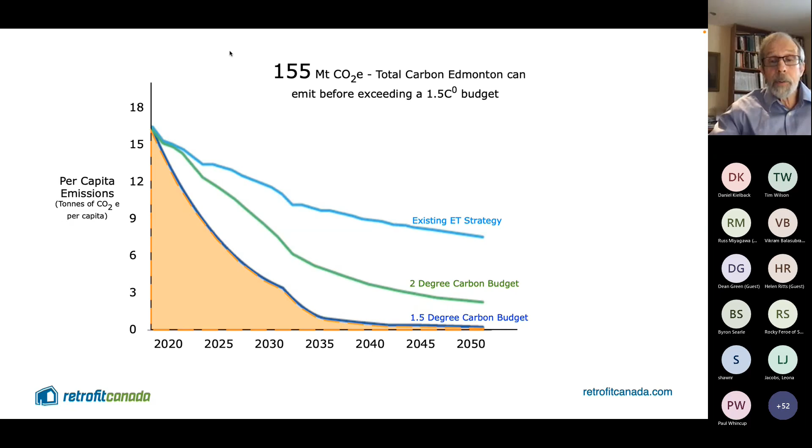If we wait 20 years before making deep cuts, it'll be way too late. In fact, at the rate we're going, Edmonton will have blown through its GHG budget in 8 years - actually 6, really. This is a 2-year-old slide.

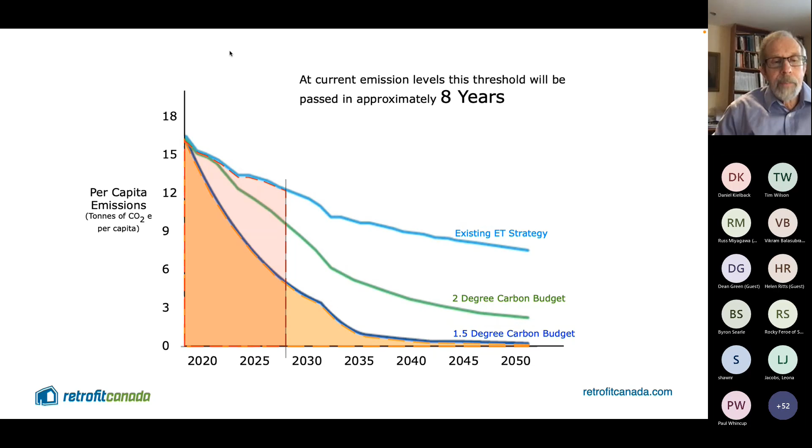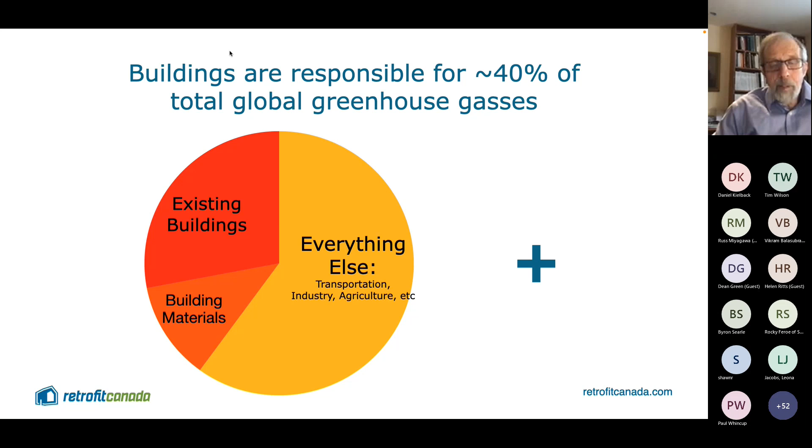And we're not alone. These graphs look pretty similar all over the industrialized world. Buildings are responsible for about 40% of total GHGs, most of that from building operation. And 70 to 80% of the buildings we'll be using in 2050 are already built. So there's just no path to a stable climate without industrial scale deep energy retrofits.

When we say deep energy retrofits, I mean energy retrofits to buildings that reduce emissions enough that the remainder can be gotten from zero emission sources. There's some discussion in the community about whether there should be deep energy retrofits or whether we should just call them deep retrofits, to encompass things like embodied carbon and that kind of thing.

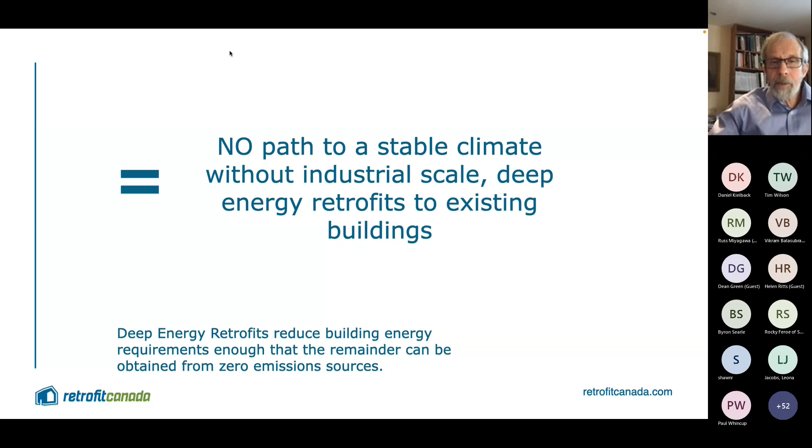But it's a really curious juncture, a profound challenge, and I think unprecedented in human existence. Our culture of building huts evolved slowly over millennia. We got really good at sheltering from the elements and making spaces where our families can thrive. It seems like such a rude shock to find out that these shelters are threatening our very existence. It just seems ironic as all get out.

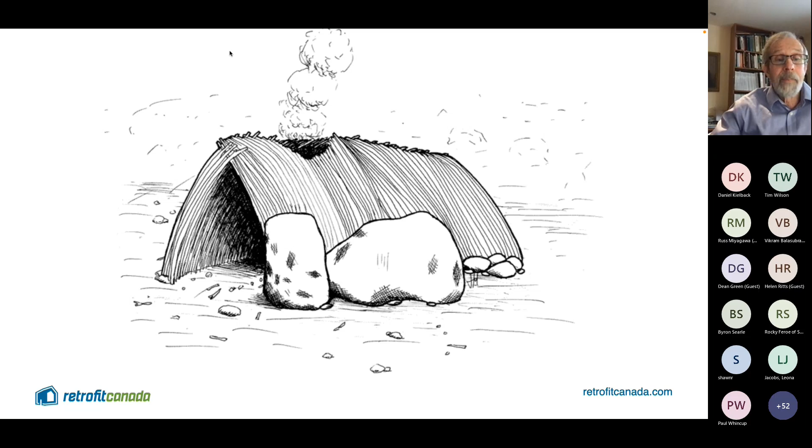So we need an industry, a massive industry. A couple of months ago I was on a call with Ralph Torrie, a really smart consultant working on a retrofit strategy for Efficiency Canada, a think tank in Ottawa dedicated to accelerating energy efficiency policy in the country. Ralph asked me - I'm a little one-at-a-time builder renovator - what would I do if I had 5,000 or 6,000 houses to do? It was kind of a shocking wake-up call. I really hadn't thought about that scale before, but that's really what we need to do.

So I started thinking about what are the ingredients we need to make this kind of a massive shift. Obviously we need market demand, there needs to be a value proposition, skilled workforce, supply chain - which I don't think would be a big problem - and all kinds of solutions to handle the wide variety of problems.

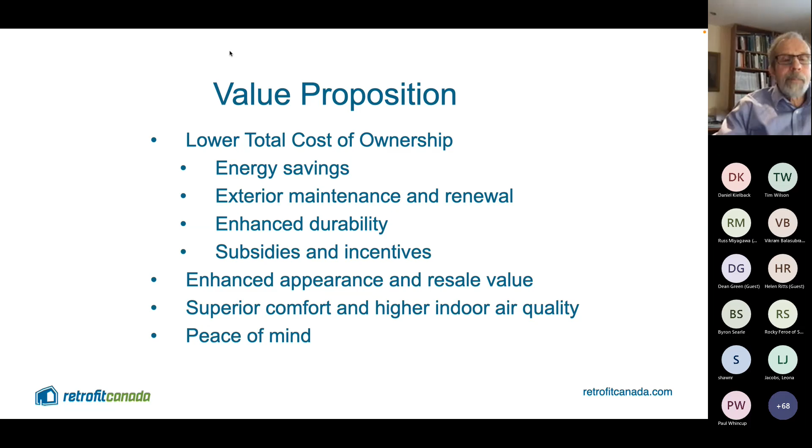So the skilled workforce is an enormous challenge. We need energy modelers who understand optimizing net zero energy solutions. There are a few of them, but there's a whole bunch that need to be retrained to learn that. We need designers who get it and build it into their designs from the beginning. We need really inventive renovation contractors who understand and practice airtight and thermal bridge-free construction, and an army of skilled tradespeople - talk about a job creation program. And in this training, passive house training is a huge asset.

We need a set of solutions and recipes that are flexible enough to deal with the incredible diversity of buildings we have - different housing types, shapes, ages, conditions, climate zones, all that stuff. We need all kinds of repetition and practice. We need to get going and do this stuff and streamline those solutions. And we need to document and share lessons so we can learn from each other as quickly as possible.

And one thing we can't do is continue with incremental piecemeal retrofits, the kind that very well-intentioned efficiency programs have been incenting for the last 50 years or so. The problem is that the measures done under these programs often make it much more difficult to ever get that building to a near zero carbon solution, to a net zero solution. They do save energy and GHGs, but most of the time they lock in the remaining emissions from that building.

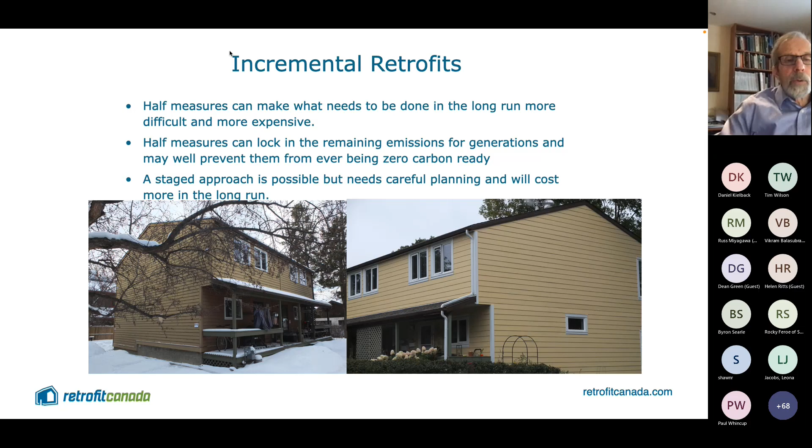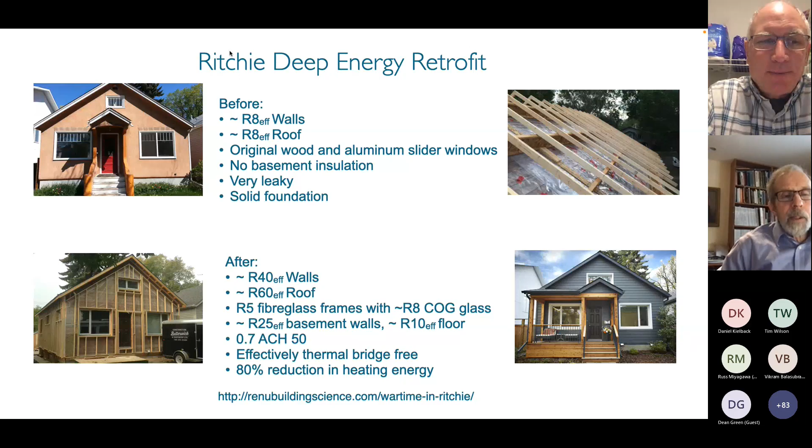The other end would be something like this duplex in Riverdale, which just happens to be where I am right now. I built this around the year 2000, to the at-that-time R2000 standard. So it's got decent insulation, reasonably airtight, fairly good windows. It's in really good condition, and it wouldn't be cost effective to do an exterior deep retrofit to it, because the upside would be too small and the cost would be huge, especially since it's kind of a rangy house with lots of windows.

I mean, to think that 3 years later the climate crisis dawned on me, it's embarrassing.

But anyway, the solution in this project is to do the easy stuff: add a little bit of insulation to the attic, which is just a matter of blowing in a little more cellulose, change out the glass in the windows to state-of-the-art glass (the frames are decent), and do a geothermal system, which we're going to try as a pioneering, directionally drilled laparoscopic geothermal system.

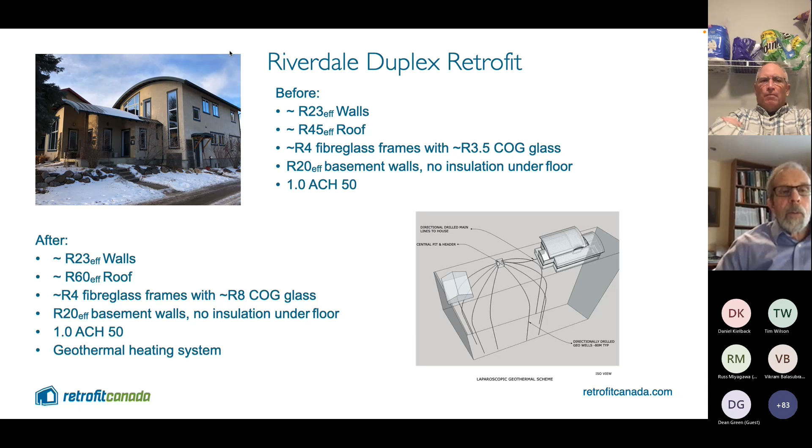So it's a broad range. There's really everything in between. We need a recipe book to help guide folks. And I'm going to show you a few of the measures that we're using, and use a couple of current projects to illustrate those. One of them is the deep energy retrofit of the Sundance Housing Co-op.

This is a 1970s, 59-unit townhouse project, 15 buildings. We're using a panelized retrofit system, with some help from NRCan as an R&D project, and it is the first large-scale trial of the Dutch Energiesprong system. Look it up—I don't want to take the time to describe it right now, but we're proud to be pioneering this technology in North America.

We're on our 7th building, so we're getting the hang of it. It's going slower than we'd hoped, despite all the cool stuff like the digital capture and offsite panelization. The grim reality is that this is exacting renovation work with all the finicky detail that implies. The good news is that as we go from building to building and run into these tricky problems, we're finding better and faster ways to deal with the weird anomalies.

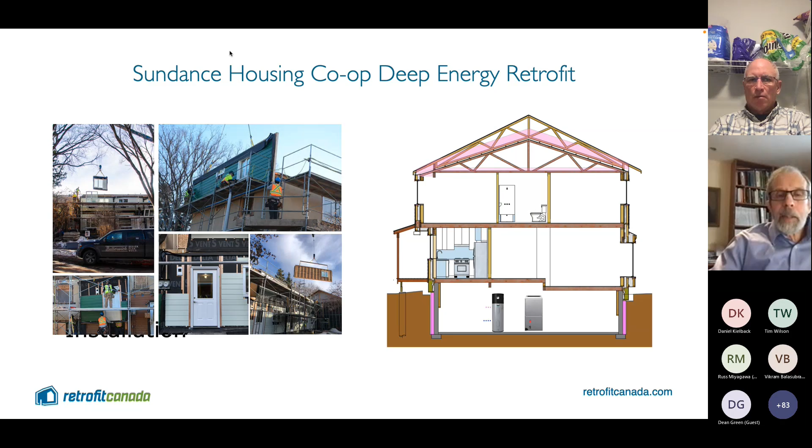We're learning a ton, and this will all be available on the Retrofit Canada website. The other project is 3 single-family houses where we're going to try to use what we're learning on the Sundance project and apply it to single-family houses. The GHG impact from Canada's 8 million single-family houses is far bigger in total and per capita than it is for multifamily buildings, and this is a problem that urgently needs solving.

So we'll be doing these 3 houses over the next building season. We're gearing up—we've got it pretty much figured out now, and we'll be sharing those solutions as well. So let's look at some of those particular things. The first thing is: don't even think about tackling a retrofit without starting with an energy model. You're shooting in the dark otherwise.

You really need to start with an existing energy model and then twirl the dials and look at the cost benefits of each measure to find the right mixture for that building, so that you're not putting way too much insulation in one place and not enough in another.

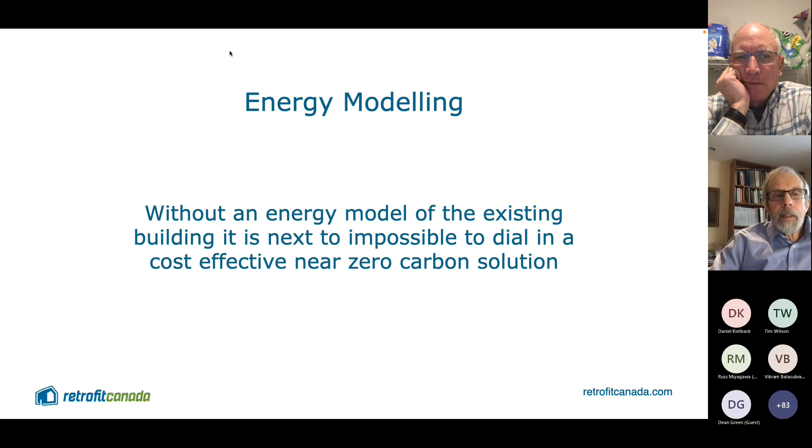Starting at the bottom, we've got a variety of foundation insulation solutions in the Ritchie project that I showed you. They insulated on the inside. That can be very difficult if the basement is finished and too expensive to be practical. Typically this is a less expensive approach if the basement is pretty unfinished.

One of the bonuses over the outside approach is that you get the opportunity to insulate the floor too, which is a big boost and kind of a sore point for me. I'm talking to you from my basement office with its uninsulated floor, and it's a daily reminder of how easy it could have been to avoid this problem.

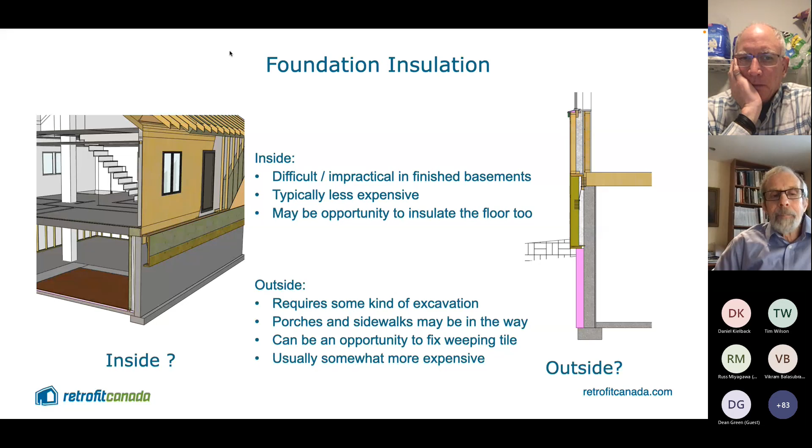On the outside, you're always going to have to do some kind of excavation. Porches and sidewalks can be a barrier, but it can be an opportunity to fix weeping tile if that's needed. And it's typically going to be more expensive.

On the Sundance project, we started by doing a full excavation with a mini backhoe, and it was a nightmare of disruption—we had to completely re-landscape, and we had mud everywhere and settling. So we've gone to a system where we hydrovac a slot around the exterior, then drop in EPS foam, and top off the wear layer with our panel support system. These details will be available. I'm not going to go into them in too much depth, but they're readily available for anybody who's interested. We're liking that system, and we have an improvement on the way with it.

And we'll be doing the hydrovac solution on the 3 SSRA houses, except for one which needs weeping tile.

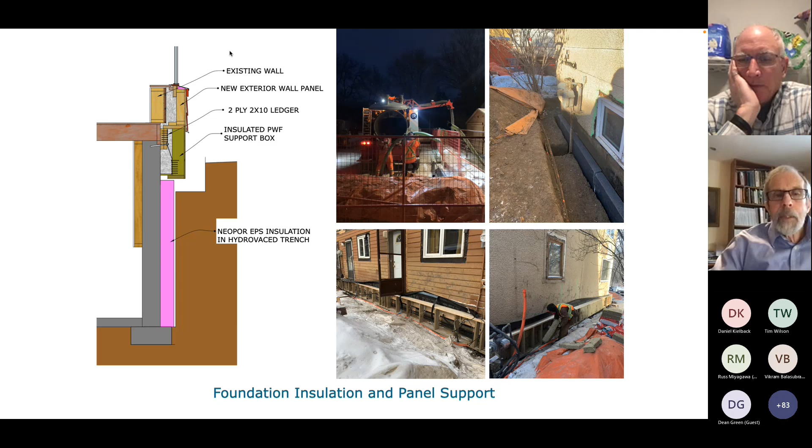So for the exterior walls, there are a few ways to go about it. Doing it on the exterior as opposed to the interior seems to be the only practical way. Working on the inside, there's far too much stuff in the way: partitions, floors, cabinets. There's the issue of the loss of interior space and the difficulty of getting any level of airtightness. So generally, the solution is to work from the outside.

On the Ritchie house, we did a very light frame build up on a panel support box at grade. We wrapped the whole house first in a poly vapor barrier, which ended up on the warm side, and then insulated inside the framing, and then put the new siding over that.

One of the good things is on the outside, it doesn't cost much more to go thicker, so you can accommodate high R values. If you add a rain screen, it can be extremely durable.

As opposed to the panelized approach, which I'll get to in a second, this site-built approach is easier in some ways, but it takes more work. It's more labor intensive, it takes longer, it's more disruptive, but you just build to what's there. It's harder to make a mistake.

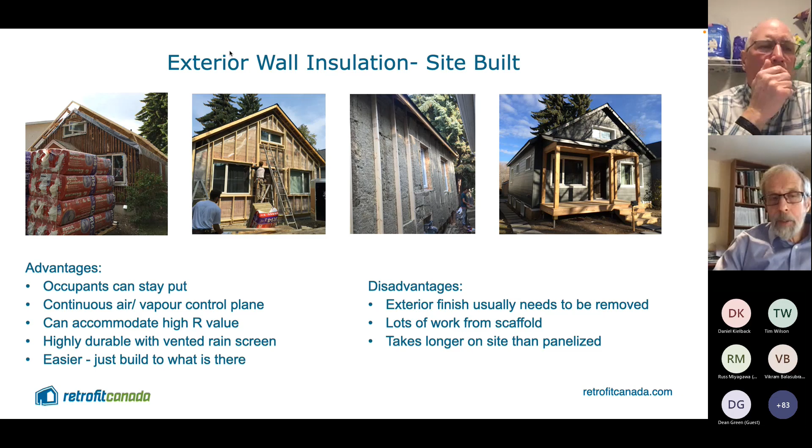An interesting approach that Peter Darlington from Solar Homes in Calgary is using with great success: he comes at this as a stucco contractor, and he figured out, starting with his own house, that he could make it net zero by thickening the foam enough. The airtightness was already coming as part of the exterior insulation system, but there's a barrier that gets rolled onto the existing framing. All he had to do was knit it into the attic, increase the attic insulation, and somehow deal with the foundation. I'm not sure exactly how, but this is quite a workable solution.

It's relatively high embodied carbon, although the global warming potential of EPS foam is coming down.

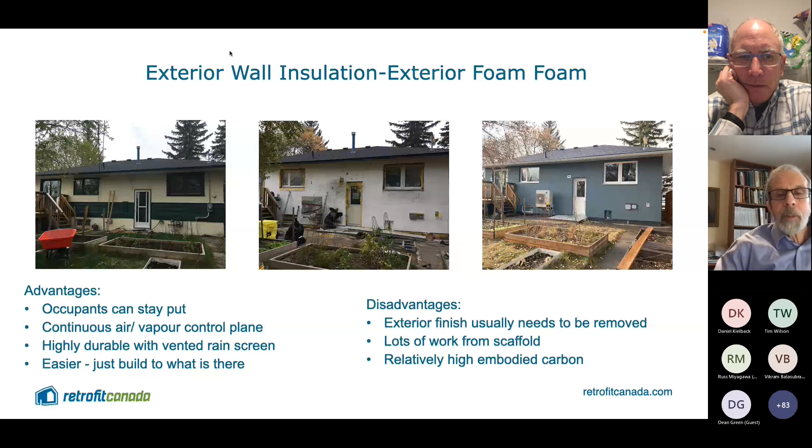And then there's the exterior panelized system, which we're using at Sundance and SSRIA. It's faster, less time on site, less demolition waste. All the same advantages: we've got a continuous air vapor barrier, vapor control layer, high R value. We're adding about R30 to these walls.

But so far it's a little finicky. Fit is critical. You spend a long time prepping the buildings, making these offsite panels. They come, the windows are installed very carefully in a thermal bridge free and airtight way. And if you have a panel that doesn't fit, well, you've got a crane and a crew of 6 or so—it could be super expensive.

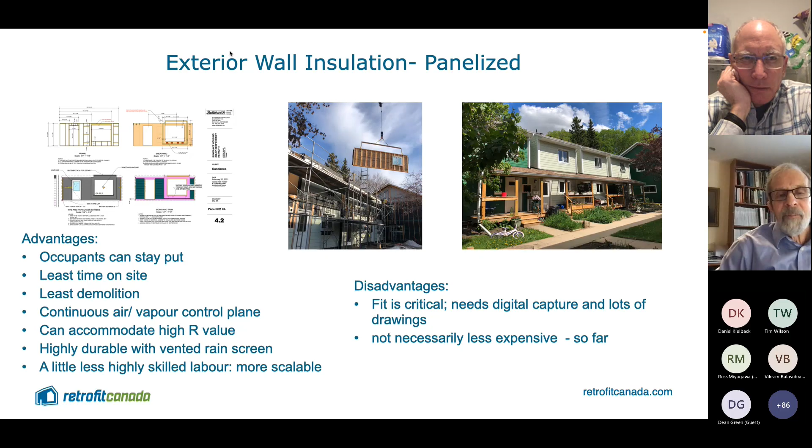I'm happy to report that so far, every single one of our panels has fit very nicely, and they're actually getting better all the time as we practice with this. It's not necessarily less expensive yet, but I think it can be. I think of all these approaches, it has the most upside for innovation and mass production.

So we need some kind of digital capture, like measuring with tape measures is just too error prone and slow to do this. On the SSRIA project here, we're working with a brilliant young programmer who comes from the gaming world, and he's developed a photogrammetry app that's working really well.

He starts with drone-based photos. Drones, not just because they're cool, but because you can get the optimum angles from a drone. You can photograph basically from anywhere and get that perfect angle for good resolution and the right place to screen out, or to poke behind that tree, that kind of stuff.

It produces—he smooshes them all together into a pixel cloud, which is kind of like a panoramic photo except 3D. He takes 3 measurements from each of 2 sides of the building to make a big triangle, then feeds those measurements into his pixel cloud and resizes it so that those measurements are accurate. At that point, he can take measurements on the far side of the building where he's taken no measurements, and be within about 5 millimeters.

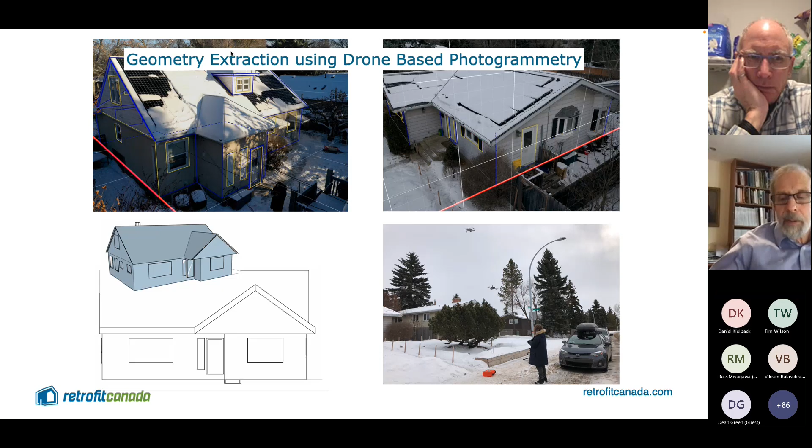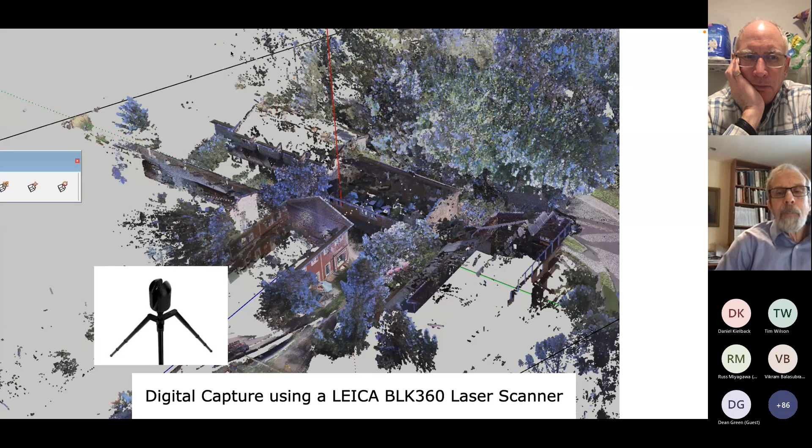The other approach, which is a little more elaborate, is what we did at Sundance, where we hired a really smart surveyor to do a laser scan—actually 55 laser scans of the co-op—to get the whole thing, and then he registers those together so that it's one big cloud of points, about 180 gigabytes, subtracting duplicates and resizing it according to some total station measurements, and sends us a cloud file that he clips out of the big cloud, one for each building.

And then we bring it into SketchUp using a program called Undet, which finds planes and helps us extract the geometry of the building. This is a fair bit of work, because the buildings aren't level, square, or plumb - nothing's perfect, and they've had 45 years to settle and probably weren't that square in the first place. We need to manually and judiciously fudge the geometry we've extracted to make it orthogonal, so everything's on a 90-degree plane. Anyway, this is working very well.

We'll be doing a webinar on how to do this, in which we present Logan's photogrammetry solution, along with a couple of different approaches to LiDAR scanning.

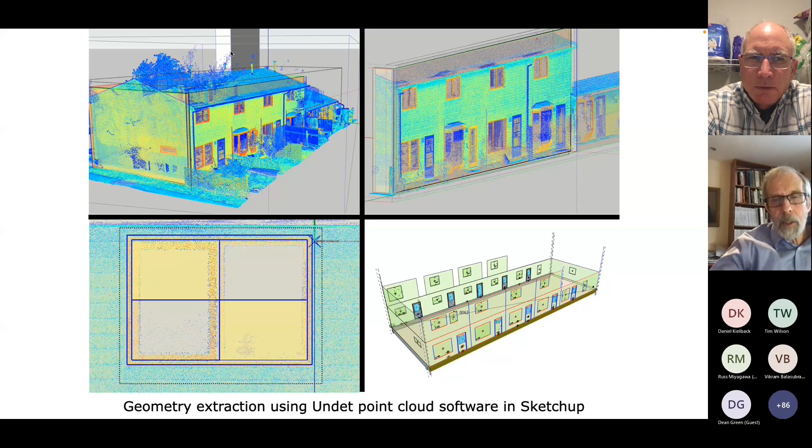So then, getting up on the roof - the best approach depends on what you're starting with. The least expensive is probably to work from the inside. There are really two big considerations.

One is airtightness. In many instances, you have to suck out the attic insulation. So far we haven't found insulation contractors who will reuse it, so that's kind of distressing. But you clean out the attic and then put down a layer of spray foam that seals all of the existing penetrations, and then put insulation back in. That is probably, wasteful as it sounds, still the most economical solution if the existing roof structure is built in a way that you have high enough heels at the corners to accommodate enough insulation to deal with that cold spot.

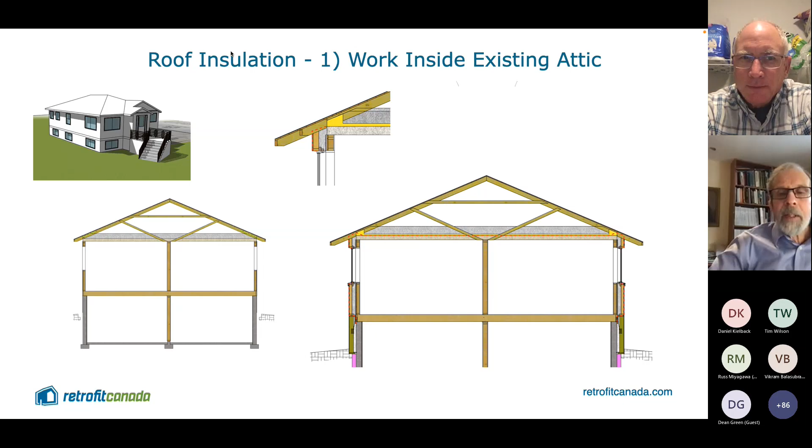So in one of the SSRA houses, we have that, and that's what we'll be doing. In the second one, we don't have enough roof structure to accommodate enough insulation. It's a 1950s semi-bungalow, 2x4 framing - very hard to get enough insulation in there to get us into net zero energy territory.

So we're going to wrap the existing roof with an air barrier, and then build up with site framing a cavity big enough to keep that air barrier warm and above the dew point, and add enough insulation to get us up into the sort of R60 territory, which seems to be kind of a sweet spot.

And in this particular case, we're also adding a porch that fits the house into the neighborhood a little better than it did, even though it's been there for 50 years. It's not bad, but the owners want to do that and take advantage of this opportunity to really spruce it up and add some amenity. So because we're doing that at the same time, this built-up approach makes even more sense.

And the third approach - this is what we're doing at Sundance. There, the heel heights were low, the existing attics were very leaky, there wasn't much insulation in them, and we're building a whole new scissor truss structure over the top. That's another consideration in figuring out the roof buildup.

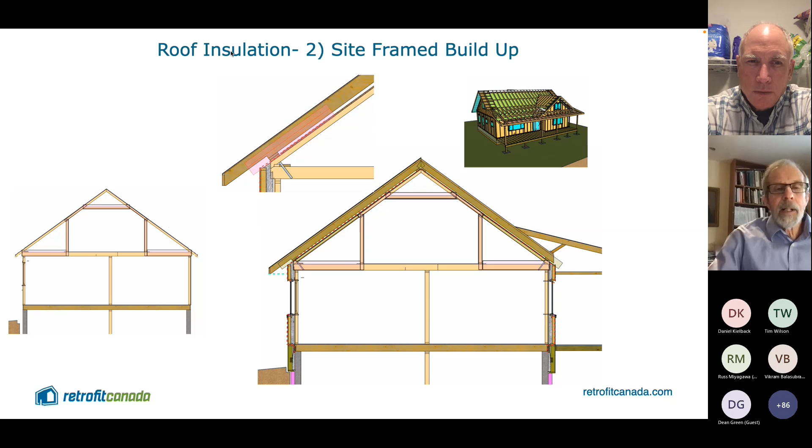But in the Sundance case, we're putting an entirely new load-bearing structure over the top, so the load stays where it is on the walls, and we can add another R50 over the top.

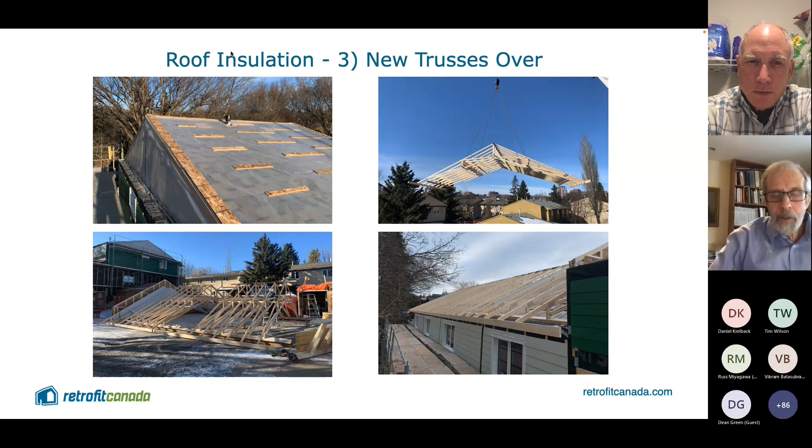So in all of this work, air tightness and air and water sealing is critical. Air leakage is the biggest single component of heat loss in most older buildings. In the Sundance example, the buildings we tested were coming in at about 3.5 to 4 air changes an hour under test conditions. We've gotten that down to 0.6 - not quite passive house territory, but the energy savings from that tightening are a big chunk of the value proposition.

And that takes attention to detail, figuring out all of the junctions between the walls and the roof, walls and the foundation, and the walls to windows, that kind of thing. These are solutions that are familiar to any net zero builder, and that need tweaking for retrofits, but we're up to it, I think.

And we're also doing rain screens on all these buildings. With the rain screen, nothing is perfect. This is very durable siding - it's Hardie siding - but in a real driving rain, it's possible to get a few drops coming through.

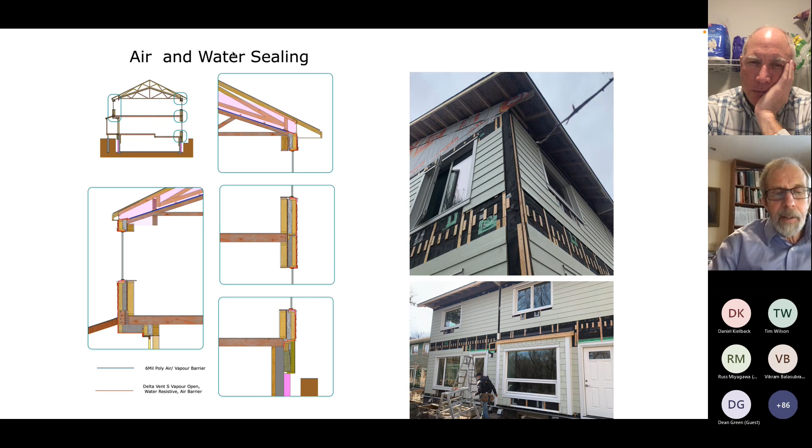The fiber cement siding is great too. This should be like a 50-year proposition with maybe just a couple of coats of paint in the middle.

So anytime that you tighten a building up, you have to add an HRV. We humans need fresh air, and I haven't built a house since the 1970s without an HRV. In fact, I made my first 3.

They not only provide a controlled supply of healthy fresh air, but they also extract—they keep you from wasting the energy used to give you fresh air. The outgoing stale air preheats the incoming fresh air, and it's always worth it to spend a little more for a high efficiency HRV. On a dollars per kilowatt hour per year saved basis, higher efficiency is near the top of the list.

But putting HRVs in existing buildings can be challenging, and you've got to get exhaust ducts up to any second story bathrooms, and all the bathrooms and the kitchen. Usually the main floor is not too bad in an unfinished basement situation.

And at Sundance we got lucky. It dawned on us that we were pulling out the existing gas chimneys, and that we could use the chase for that to run a duct up to the attic, and then hop over in the attic to the bathroom ceiling. So we had zero drywall repair to get that to the top—no paint, no nothing. So sometimes you get lucky.

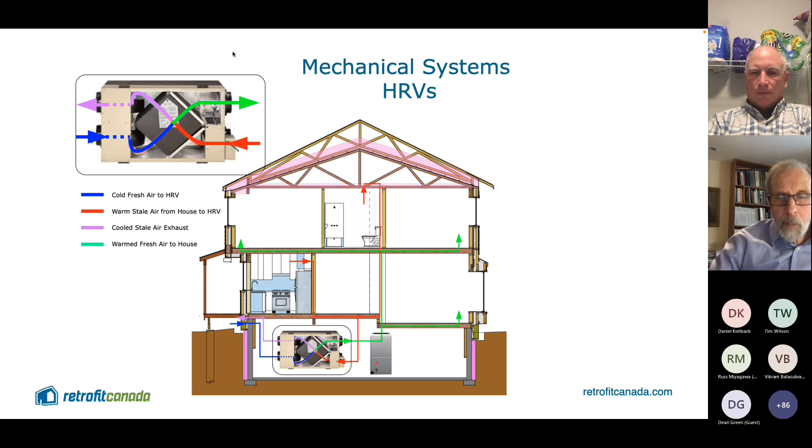So we're reducing the energy load on these buildings enough that electrification can make sense. We have to basically electrify. It's one of the key tools in combating the climate crisis.

And so this lets you go directly to air source heat pump heating. And because the loads are so much smaller, these things work. I would not put one on a house without doing a deep retrofit to it.

They provide 2 units of heat over the whole season—they'll give you 2 units of heat for every unit of electricity you put into them. Now you're paying more per unit of electricity than you are for gas, about 4 times, but you've also really reduced the total amount of energy.

So when you start to consider carbon tax avoidance and the avoidance of the fixed monthly meter charges, you're in the black.

But there's some things you need to keep in mind, because I think it's going down to close to -30 here in Edmonton tonight, and when they get below -30, their efficiency drops off, where you might be putting in more than 1 unit of electricity for each unit of heat you get out. And because they have to work really hard to keep you warm when it's -30, we always put in—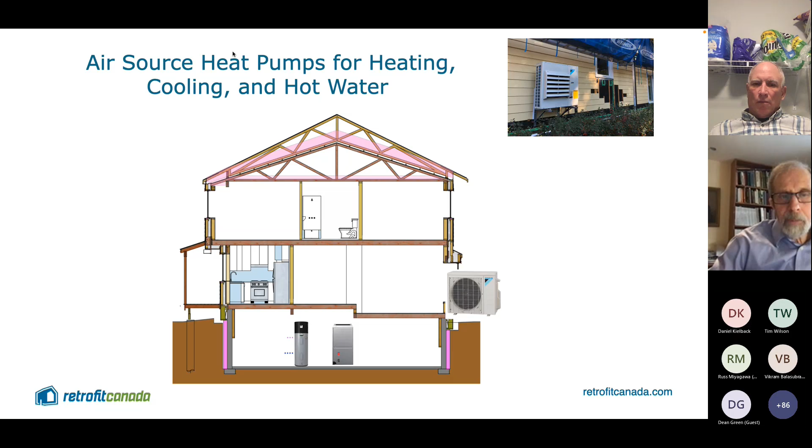So there are a zillion more details we could go into, but I want to jump back a little bit to the big picture and where we go from here.

We get people asking us frequently, and more these days, what can they do with their house. There's a real lack of information and guidance, and the result is these piecemeal upgrades that I'm complaining about. We need a retrofit roadmap for these folks and for the contractors and consultants that they're going to need to do the work.

And in our vision, it works something like this. We start with a gallery of case studies, fairly high level.

It cost them about $115,000. Whoa, that's more than I hoped. But when I look at their total cost of ownership, they've got it paid off in a reasonable time, and then they're laughing because they're not paying carbon tax, and their house is operating pretty much energy cost free.

And here are the details on how they did it, with a deeper dive. So, wow, it really looks great. Like I would be proud to live in a house like that. And it's so much better.

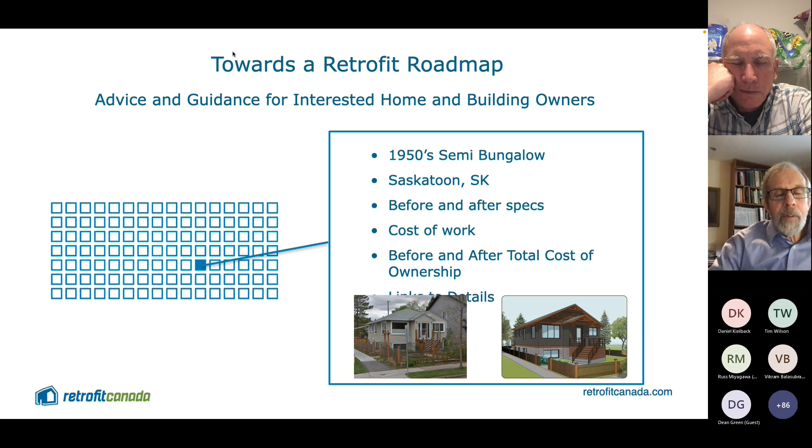So at the homeowner end, that's what we show. It kind of says, okay, so what do I do now? And so then the next step would connect them to a network of energy advisors, designers, and contractors who know how to do this stuff.

And there would be resources for those folks on the site as well. Energy models, the case studies would have energy models, upfront carbon tallies, details, drawings, successful techniques, hopefully mistakes to avoid. Sometimes you learn more from people's mistakes than you do from their successes. Total cost of ownership and links to incentives.

The idea is that as we collect case studies from people, that we will be able to get their favorite details, ones that work, and we can have a database of solutions for various conundrums that people will run into.

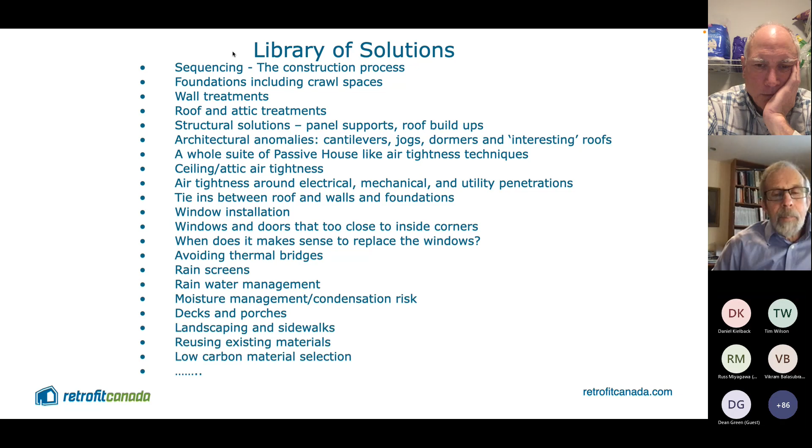And this is all open source. We really think this is a missing critical practical step in building this industry, and we're committed to providing it. But we need help.

I remember, and we built the darn thing, and it worked. But I remember the morning TV host who came on the tour and came into the mechanical room and said - she looked at this thing in horror, and I thought it was beautiful. All this gleaming copper. I just wanted to put a little TV down there and hang out with it.

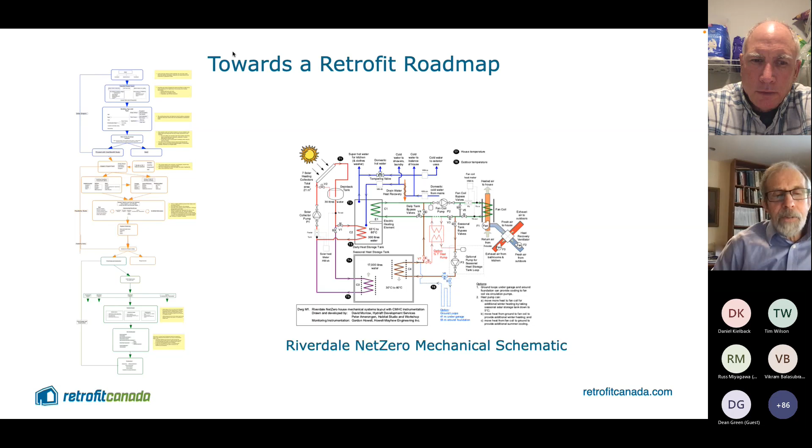So our next steps, we're going to establish Retrofit Canada as a national entity. We've got some really impressive board members who've just joined recently.

We're currently test driving templates for intake for the gallery, so we can start populating the website. We're starting to develop version 2.0 of the retrofit roadmap. It won't be quite the fancy dashboard version, but we've gotten some funding assistance from EcoTrust to take it another step of the way while we look for the funding to build the app. We'll continue the webinar series with deep dives into some of these topics that I just barely scratched the surface of. We're really hoping that with your help, cooperation and collaboration, we can learn from each other, teach each other. I think it's an emergency, we have to.